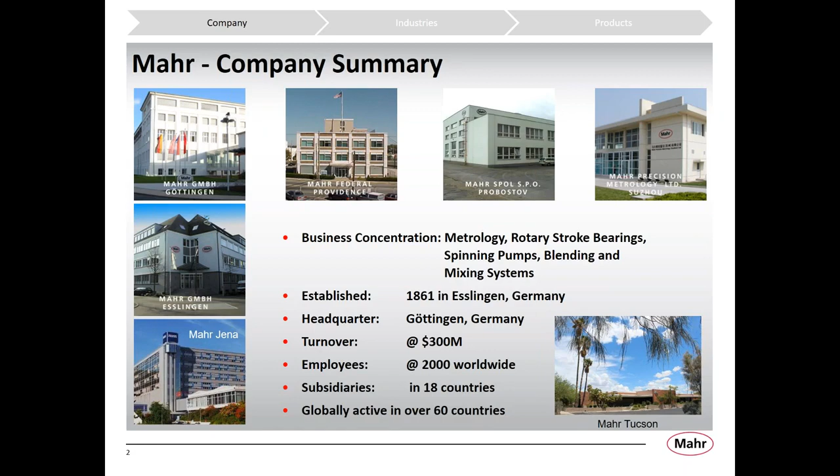Specifically for Mahr OKM, about 2004 Mahr created a division, which I've mentioned a couple times, called Mahr OKM, based out of Jena, Germany. We're actually located in the Zeiss facility on the 7th floor, and that's where the majority of our R&D takes place.

In about 2015, about 2.5 to 3 years ago, Mahr acquired a company out of Tucson, Arizona called ESDI, which joined the MAR group. MAR took all their profilometry experience and precision gauging experience from the dimensional and PG side of the world, and then incorporated the Fizeau and interferometry metrology systems into the product portfolio to give a full symmetry to their product offerings for the optics community.

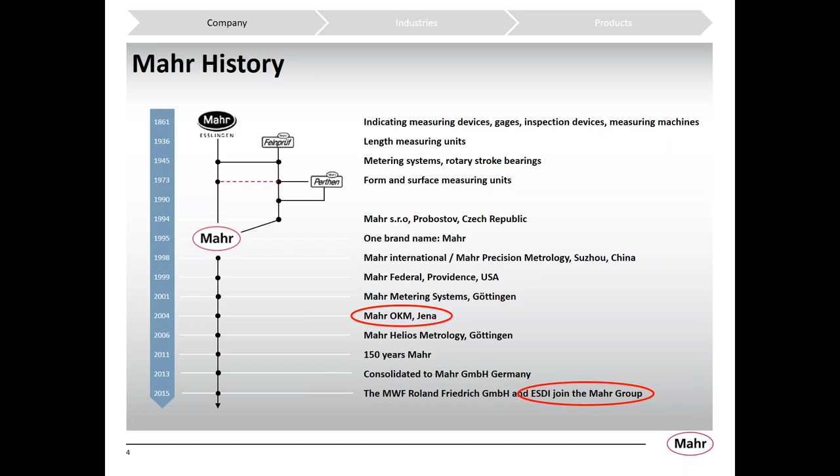We have our service support center out of Erlanger, Kentucky. We have Charlotte, North Carolina. We have a location in Cypress with a full demo facility. And Tucson is where we manufacture the Fizeau interferometers, and also where we have our engineering support and application support for the Americas.

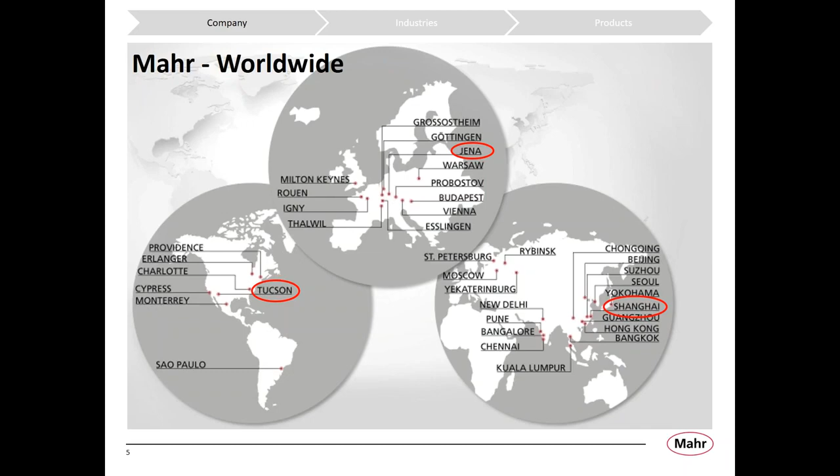Profilometry, contact, non-contact, and Asphere metrology, specifically non-contact Asphere metrology systems as well. I just wanted to give a brief summary of who MAR is, what MAR does, and what MAR offers.

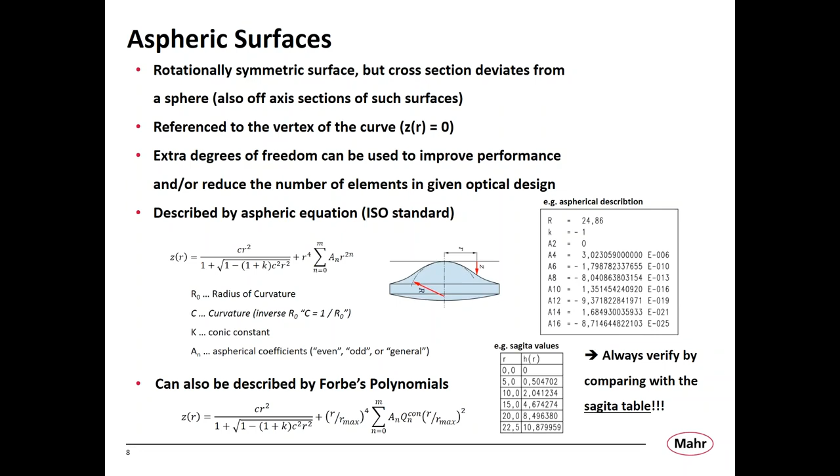However you describe the surface, since there are so many ways to describe it on your optical drawings, it's important to also include a table of the sags, the deviation from a flat of the surface, so that when the person puts the equation into their generating machine, or we're trying to compare it to some measured data, we're able to compare the as-designed to the as-measured or as-generated surfaces. And we make sure that we're all using the same equations and the same coefficients.

So for freeform surfaces, they have no particular axis of symmetry, and so there's no particular reference for the surface. And so it's always important to be able to, in the design, define some surface, define fiducials, and define datums that can be used to reference the surface to the generating machine, to the measurement machine, and to the final application.

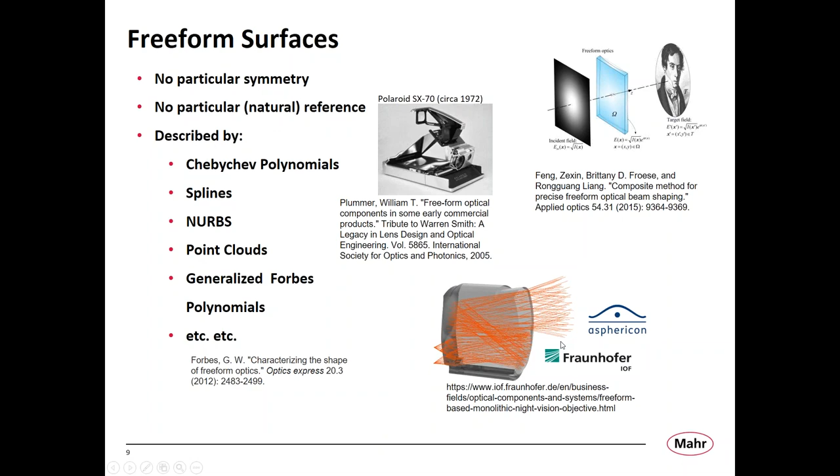However, whether it's a freeform or an aspheric surface, you need to be able to make it. Flats and spherical surfaces are relatively easy to make because they can be made through random processes. But freeform and aspheric surfaces need to be made through some deterministic generating process, such as diamond turning or deterministic grinding and polishing, like is used in the QED magnetorheological finishing system.

Aspheric surfaces can be turned on a high precision lathe, such as a diamond turning machine. You can also use those high precision machines to make freeform surfaces by moving the tool back and forth in synchronization with the rotation of the spindle.

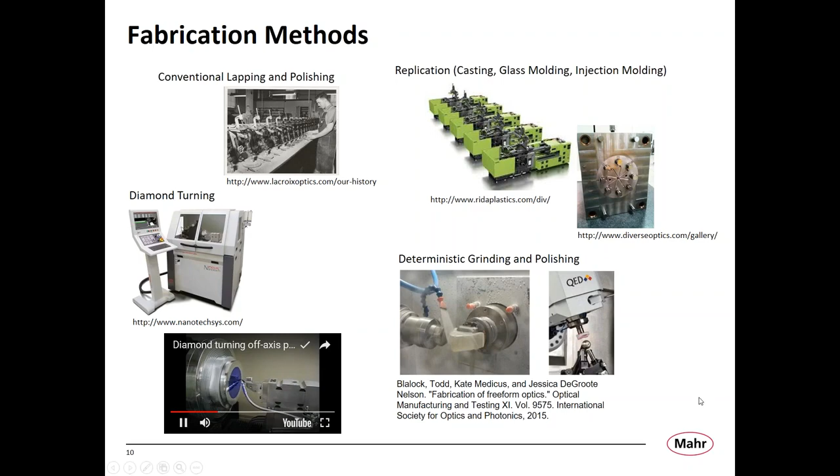However you're making the surface, you have to be able to measure it in some way to give feedback to the generating process, whether it be a tool path correction map for a diamond turning machine, a dwell map for a grinding and polishing machine, or parameter sets for molding systems. That's what I'm going to talk about for the rest of this talk, is how you take those measurements to give that feedback to the generating process.

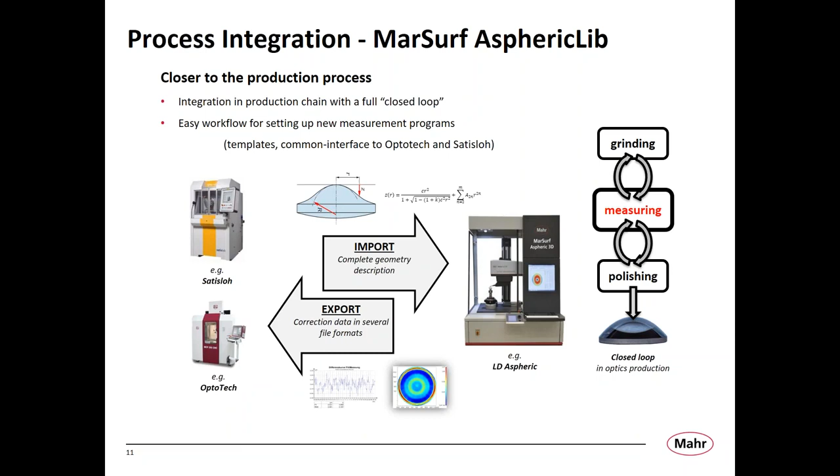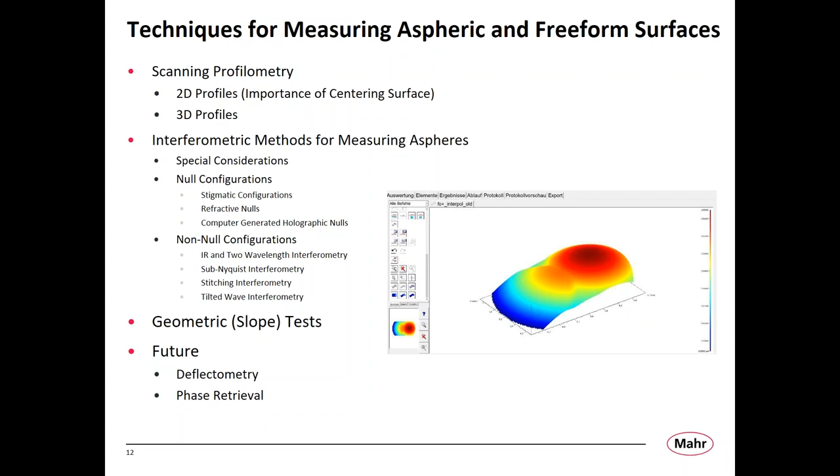I'm going to go through several different sets of techniques, including scanning profilometry, different sorts of interferometric methods for measuring aspheric surfaces, and then briefly talk about geometric slope tests such as the Hartmann Test, and finally finish up with some of the future of where I think aspheric and freeform metrology is going in the near future.

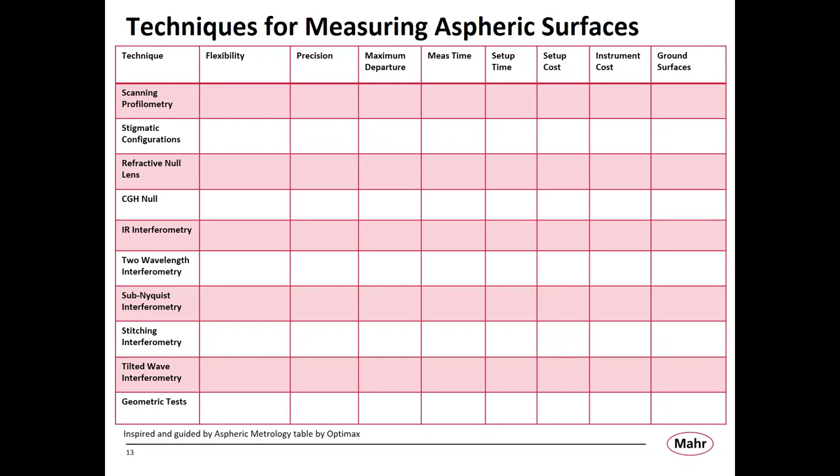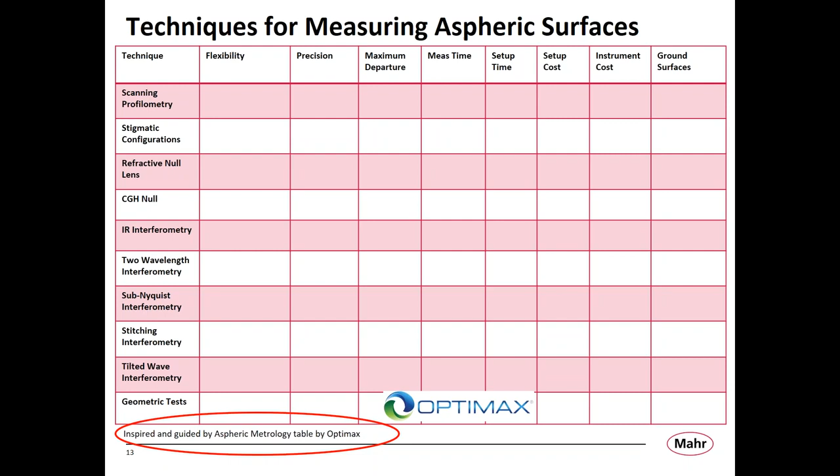The format of this talk: I will give a brief description of the technique, and then I'll bring up this table and we'll fill it in as we go along with the different advantages and disadvantages for each technique. I'd like to acknowledge that several other groups have done similar tables, and after I first built this one, I realized I'd seen this somewhere else, in a very good application note that Optimax put out concerning aspheric metrology.

The first technique I'd like to talk about is simple 2D profilometry. This is where you're dragging a stylus across the surface and looking at the deviation of the stylus with respect to position. You get a 2D trace of the surface, and for final applications you would rather have a 3D trace, but in some applications, such as when you're first starting to grind the surface, a 2D trace is perfectly fine.

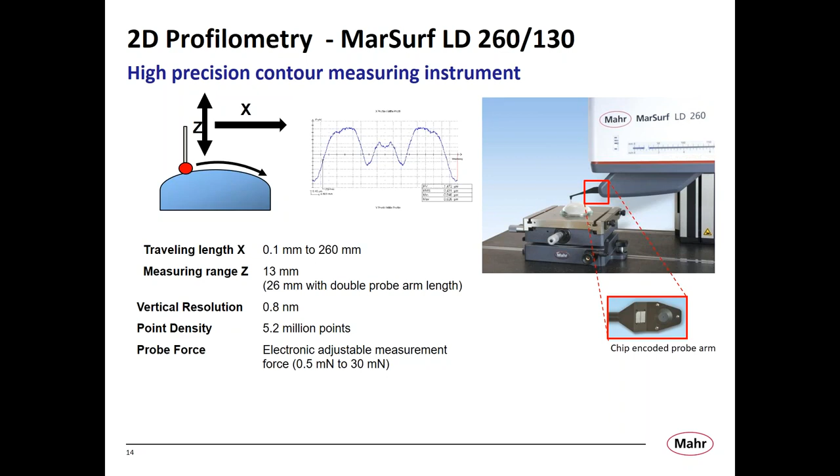I know a lot of the optics people out there cringe a little bit when you talk about dragging a stylus across the surface, but we are able to adjust the force of that stylus on the surface electronically in one of our systems, the MarSurf LD260, reducing it down to forces as low as 0.5 millinewtons. We've been able to measure some very soft surfaces with this and prove that we weren't scratching the surface by taking a scanning white light interferometer image before and after the scan. But of course, always test the surface before you do anything like this. It gives you some very straightforward data—you can fit the curve and understand what the surface looks like.

Now, if you want a 3D map of the surface, you can either probe it using a conventional CMM—Zeiss actually has some CMMs specifically made for measuring freeform optical surfaces—or you can use Mahr systems, which are very good at measuring cylindrical surfaces. We have several systems with a precision rotary bearing where we spin the part underneath the probe. By setting the probe at some distance from the vertex of the surface and spinning the part around, we get a trace of the height along a circular path. If we set the probe at different distances from the vertex, we get a set of concentric profiles of the surface, and then we can fit a surface to those profiles to get an idea of what the 3D surface of the lens looks like.

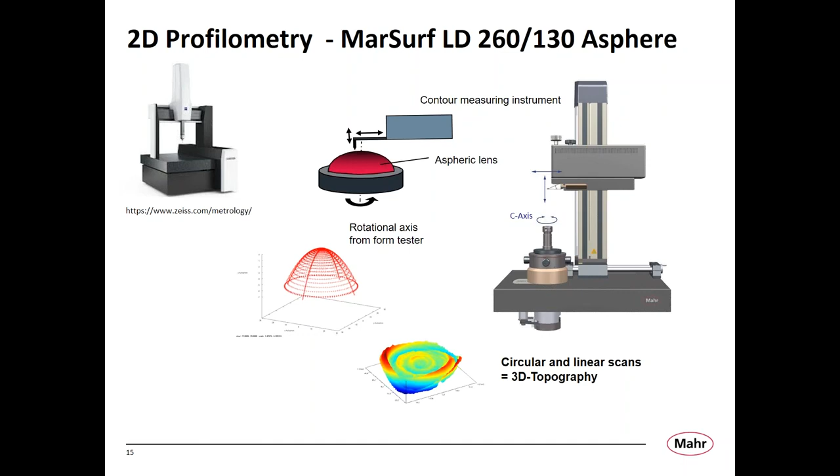So we're also able to use optical probes for doing this. We've got another system called the MFU200 that uses an optical probe where we're able to measure the distance between the surface and the tip of an optical fiber. We illuminate the surface through the optical fiber with a broadband light source.

Because there's some distance between the tip of the fiber and the surface, wherever that distance is 1/2 of the wavelength of any particular wavelength coming out of the fiber, you get destructive interference, and then we're able to record the constructive and destructive interference of the light with respect to wavelength in an interferogram. The peak of that interferogram tells us the distance between the tip of the fiber and the surface under test.

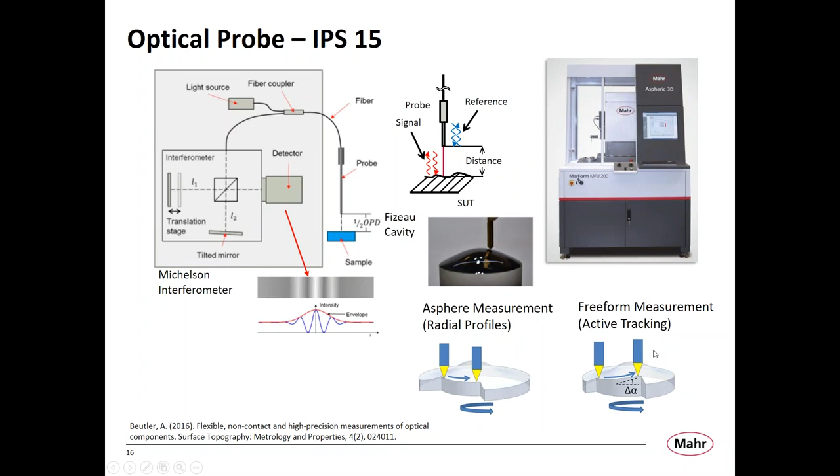So now we operate the system in two ways. In one way, we monitor the wavelength of the peak of the interferogram as we scan the part under the tip of the fiber. That's the way we usually measure an aspheric surface. Or we can try to move the tip of the fiber up and down to keep the peak wavelength of the interferogram constant, and then we record how far we had to move the fiber in order to keep that peak at the same wavelength. That's an active tracking method we can use to measure any sort of arbitrary form, like a freeform surface.

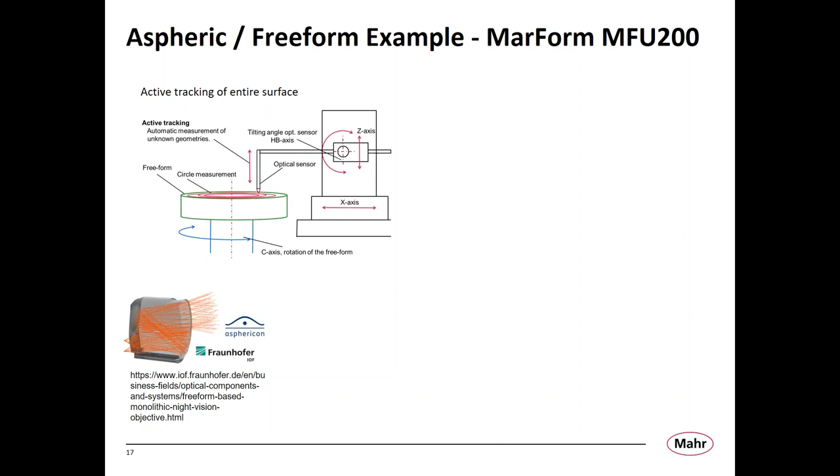So here's an example of how we use the MFU and the interferometric probe to measure a freeform surface. We measured the surface and got a surface map of the height of the surface with respect to position. On this surface map, there's two surfaces - a freeform portion and an aspheric portion. We masked out the aspheric portion of the surface and then subtracted that from the design surface to get a deviation map of the surface with respect to design.

And then asphericon was able to use that as a dwell map to correct the errors of that surface. That was used in this demonstrator monolithic night vision objective that was developed by Fraunhofer.

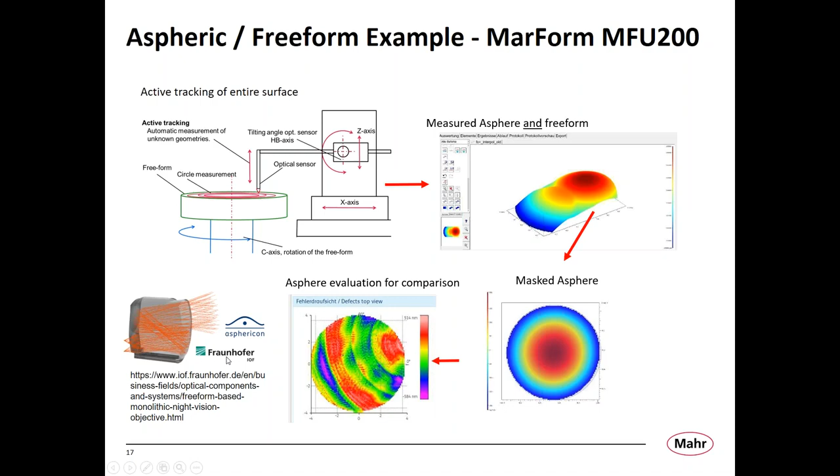Whenever you're measuring a freeform surface, as I alluded to before, there's no natural way of referencing that surface. So you need to be able to reference alignment features on that surface to your generating machine, to your metrology instrument, and to the final system.

Now, when they're manufacturing the optic, they can take that optic, put it on the metrology tool, take a measurement of that surface, then take it back to the generating machine, and use those same features on the substrate of the surface to align the optic to the generating machine. Then finally, once they have the surface they want, they can use those same features on the blank of the surface to align the optic into the final system.

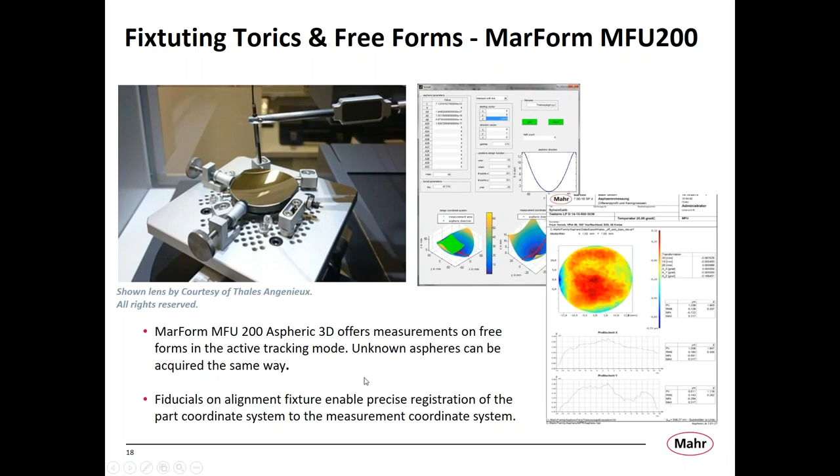And one further consideration to think about when using aspheric surfaces in particular is the alignment of the axes of the surface. Whenever you have two spherical surfaces, there's always some line that you can fit between the centers of those two spherical surfaces, which defines the axis of that particular element.

And then often you'll use that line to reference it in the edging machine, and you can define the mechanical features of the lens to line up with the optical axis of both of those surfaces.

However, for an aspheric surface, since there's an axis of rotation that's specific for each surface, there's no way, if you've got two aspheric surfaces on an optical element, to align both of those axes together - no natural way of just putting a line through both of those axes. So you need to be able to measure the tilt between the axes of both surfaces, and then also reference that to the mechanical edge of the element.

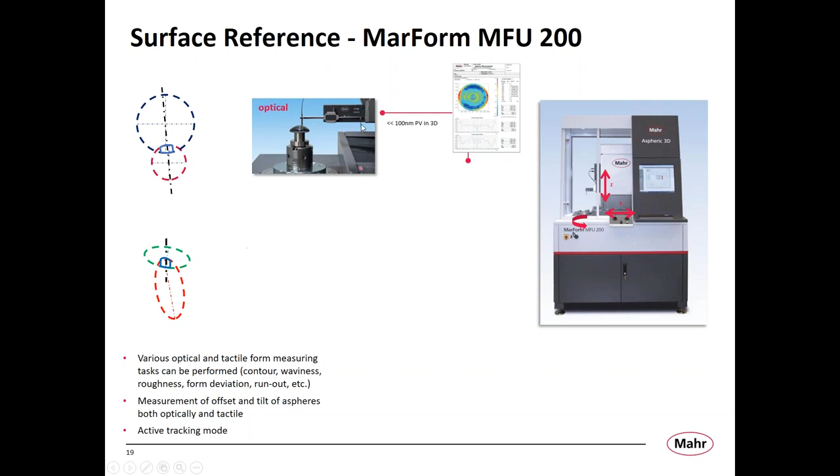So one of the ways that we do that with the MFU 200 is we're able to measure one of the optical surfaces using the non-contact interferometric point sensor, as I talked about earlier. And then we have another probe - if you can see that off to the right of that interferometric point sensor, there's another mechanical probe on that same arm.

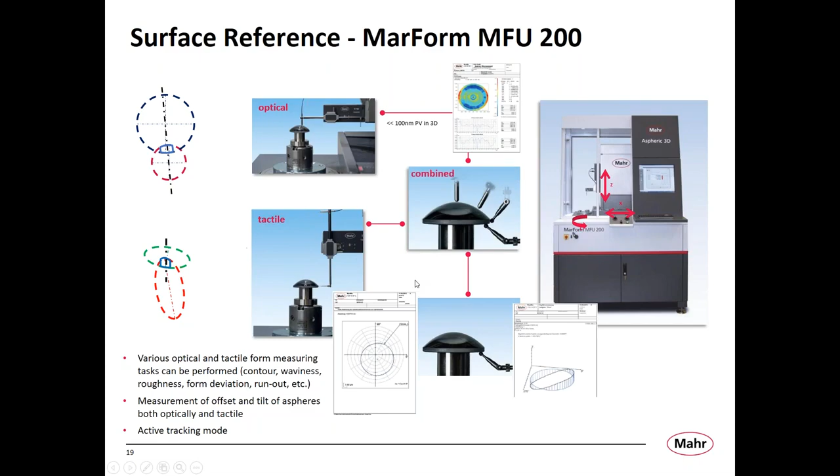So we just rotate the arm around, and we're able to use that to pick up the edge of the element we're testing, without moving the element. Then we use a third probe on that arm to pick up the underside of the element. So now on one machine, without moving the element under test, you're able to pick up the front surface, the back surface, and the mechanical edge of the part, and register all three of those together to get information about the tilt and decenter of each of those surfaces.

So some of the advantages of scanning profilometry are that there's no real symmetry required for the part. You can measure just about anything, well, within reason.

It can measure large departures of the surface from a reference surface. However, you're limited in the precision of a mechanical profiler to about 50 nanometers or so, and some, depending on the profiler, are up to 5 micron precision. But the MFU, for example, can go down to about 50 nanometers. There's a large variety of price points for these instruments, all the way from a few tens of thousands of dollars to some of the precision CMMs that could cost up to $1 million.

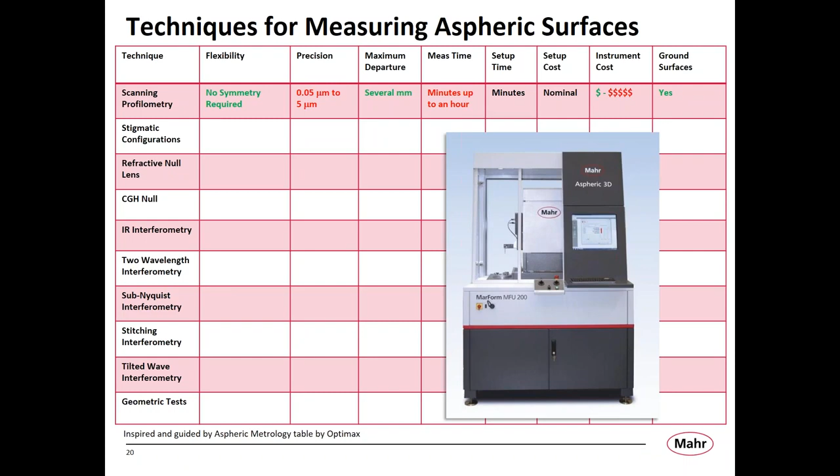One thing I didn't mention about these is that since for the mechanical probes you're not really relying on any sort of reflection from the surface, you can measure ground surfaces with these. So you can measure the surface early in the process.

The rest of the talk is going to be mostly about interferometric methods, and for this group I don't think I really have to go through this too much, looking at the names here.

But for anyone out there listening that's not familiar with interferometry: interferometry is looking at the distance between two surfaces using the phase of the light reflected from both of those surfaces.

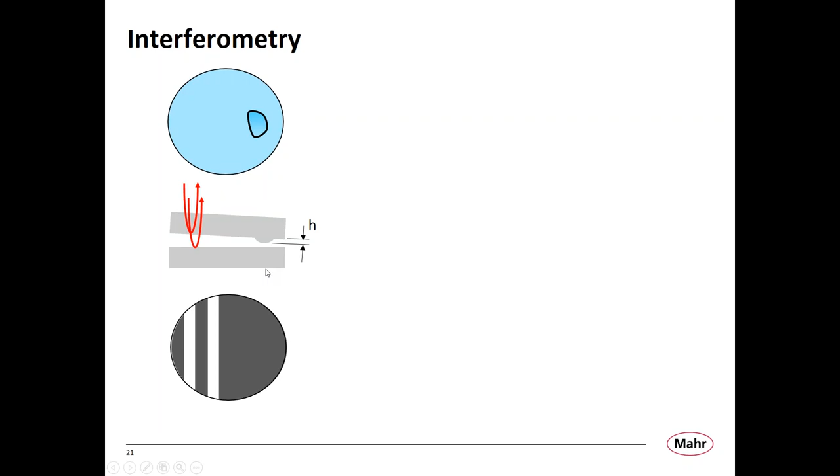If I have light reflected from this top surface, my test piece here, and then reflect light off of this bottom surface, my test piece here — if that light is in phase, then what I see up here is a bright line or a bright spot, because that light interfered constructively. Now if they're an odd number of half wavelengths out, I see a dark spot because they interfere destructively.

And if I keep going across the surface, the distance between two of the same points, we're going to call that a fringe. The distance between two similar points on that fringe is going to be the fringe spacing.

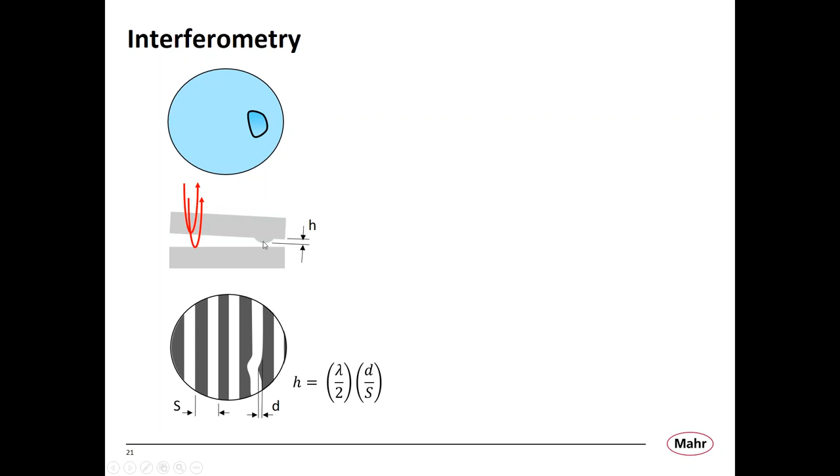So I will get fringes across until I hit some sort of deviation in that surface that's going to show up as a bend in that fringe, and the bend in that fringe is going to be related to the height of that deviation of the surface.

You can kind of think of this fringe pattern as a contour map of the surface, and as the difference between these two surfaces becomes steeper and steeper, this fringe pattern is going to become closer and closer together until you can't resolve it with your imaging system.

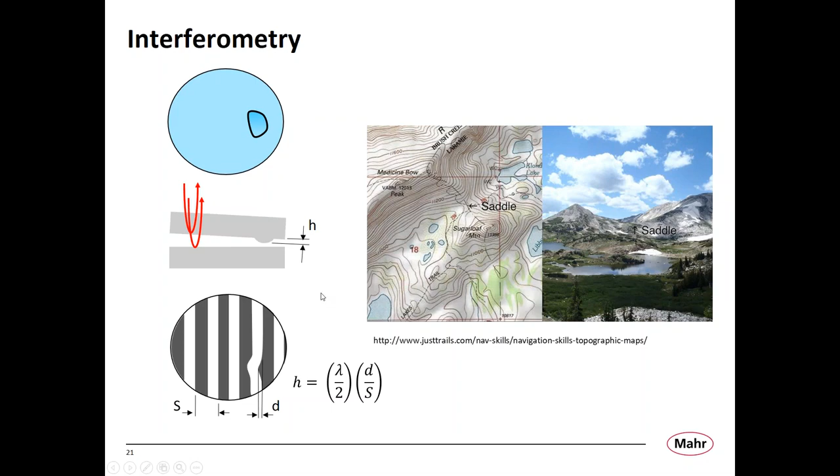That's one of the problems that I'm going to talk about in each of these systems.

Some of the unique considerations when measuring an aspheric surface, as opposed to a flat or spherical surface, using interferometry is that often these generating techniques cause mid-spatial frequency errors — errors that are not quite form errors, not quite roughness errors, but periodic errors in the surface on the order of 10 line pair to 100 line pair per millimeter, which are very difficult to resolve with conventional interferometry, but are very important for controlling the process.

With interferometric techniques of measuring aspheric surfaces, you'll also often have surfaces that have some inflection point in them. Interferometry has a hard time measuring that inflection point because the rays cross each other and you can't really tell what portion of the surface the rays are coming from.

The results of measuring an aspheric surface with interferometry are often very sensitive to alignment, and that alignment is often very difficult. So it's hard to separate errors in the surface from errors in the alignment of the parts of the interferometer.

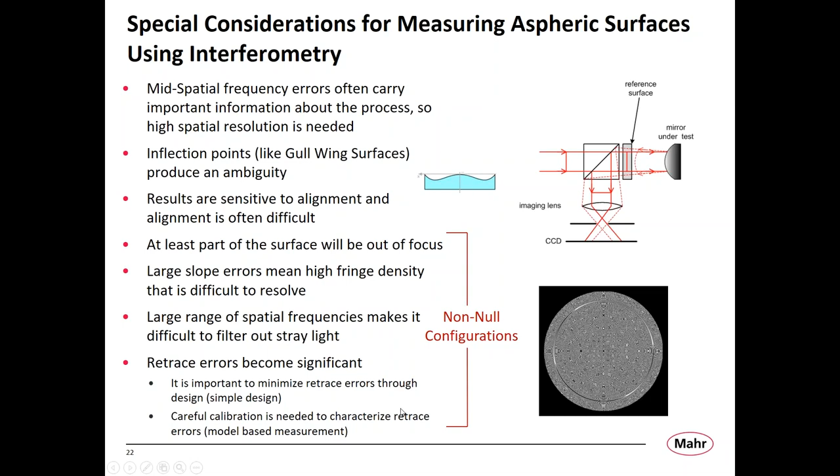Finally, because the rays don't go back through the interferometer in the same way, the interferometer is going to induce errors in the measurement. They're going to be dependent upon the surface that you're testing, and we're going to call those retrace errors. So it's important to do very careful calibrations of the interferometer to characterize what those retrace errors are going to be for any particular surface.

The first technique I'd like to talk about in testing aspheric surfaces is one that's often used for testing sections of conics. A conic surface always has a stigmatic point or a set of stigmatic points, and you can use those as a way of testing the asphere with a spherical reference.

For example, in this case, for testing a parabola, the interferometer is going to create a spherical reference wavefront using a transmission sphere that focuses to a point. If you put that focus point at the focus of the parabola, then if it's a perfect parabola, it's going to perfectly collimate the light, and you get a plane wavefront that then hits a reference flat. This reference flat retroreflects that collimated light back to the interferometer, back to the parabola, and if the parabola is perfect, it's going to perfectly focus the light back to the focus, creating a wavefront that interferes with the test wavefront. If you're all lined up and everything is perfect and the shape of the surface is perfect, then you get a null fringe.

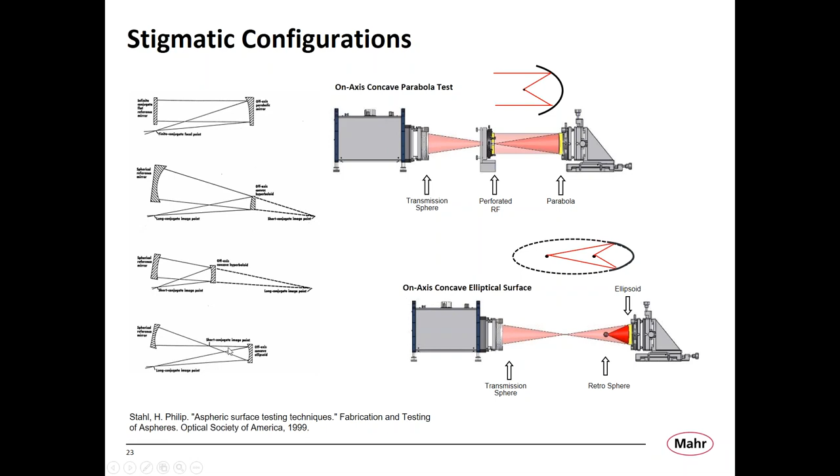Any deviation from that is either due to misalignment of the system or due to an error in your surface. So you're able to do this for many conic sections. For example, here's an ellipsoidal surface, and it's often used in testing these surfaces off axis. It's a very useful technique.

You can measure the surfaces with interferometric precision of tens to hundreds of nanometers. You can only measure conic surfaces, or surfaces that have stigmatic points, where you can get access to those stigmatic points. So that really limits the usefulness of the technique. You cannot measure large departures of the surface from its design.

It really doesn't take long to take the measurement, but it can take hours to set up the measurement because it's so hard to get the alignment right. It's a fairly cheap test because all you need is the conventional interferometer that you might already have in your optics shop, plus some auxiliary optics, and of course fixturing to be able to align everything. Fixturing can be very important in this setup—if you fixture things right, it can make the alignment a lot easier.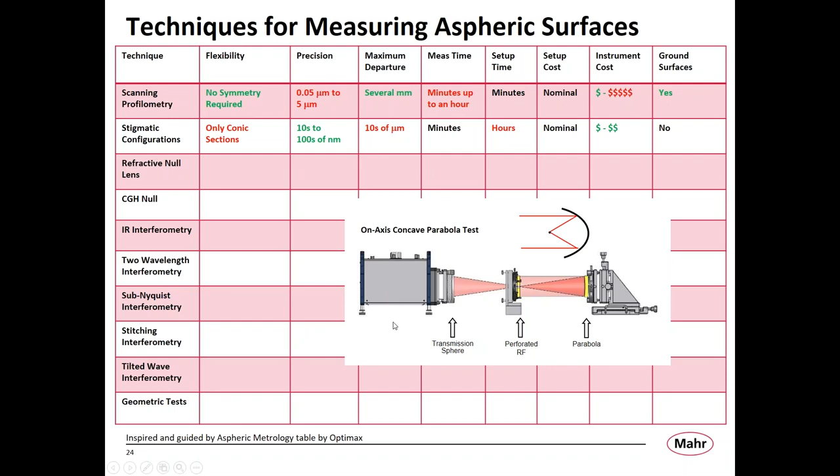The next technique I'd like to talk about extends that idea to create an arbitrary reference surface. You can create these arbitrary reference surfaces by designing an optical system that creates a wavefront with the desired shape using refractive null lenses, such as the Offner lens shown here for testing parabolic surfaces. Or you can generate that reference wavefront using a computer-generated holographic surface, or even a conventionally generated holographic surface.

For the computer-generated holographic surface, you can design an arbitrary diffractive structure to generate an arbitrary wavefront to compare with the surface under test. You can make these fairly well and very precisely using E-beam lithography and etching techniques that were developed for the lithography industry.

One of the nice things about using a computer-generated holographic null is that, in addition to making the pattern to generate the wavefront you're interested in, you can also precisely put other patterns on the same substrate at the same time, which you can use to align the CGH to the interferometer and align the test optic to the CGH. So you can really improve the ability to align the system.

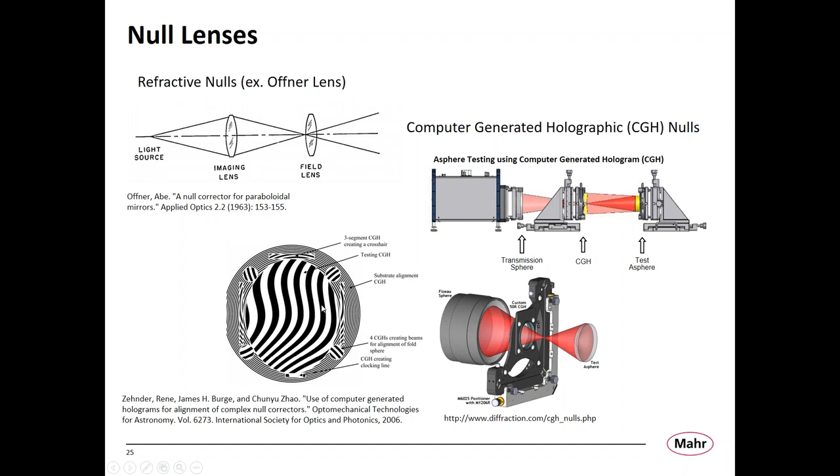So for refractive nulls and computer-generated holographic nulls, you can still measure with interferometric precision. You really can't measure any surfaces that deviate a lot from the wavefront that you generated with the null system.

They can be very fast to take the measurements, but it can take weeks to months to actually make the systems to generate the null surfaces that you want, and those can be fairly expensive. For example, a computer-generated holographic null can cost anywhere from $5,000 to $20,000. So if you're measuring a particular surface over and over again, and you can amortize that cost and setup time over all of those lenses, this can be a very good solution for measuring your aspheric or even freeform surfaces.

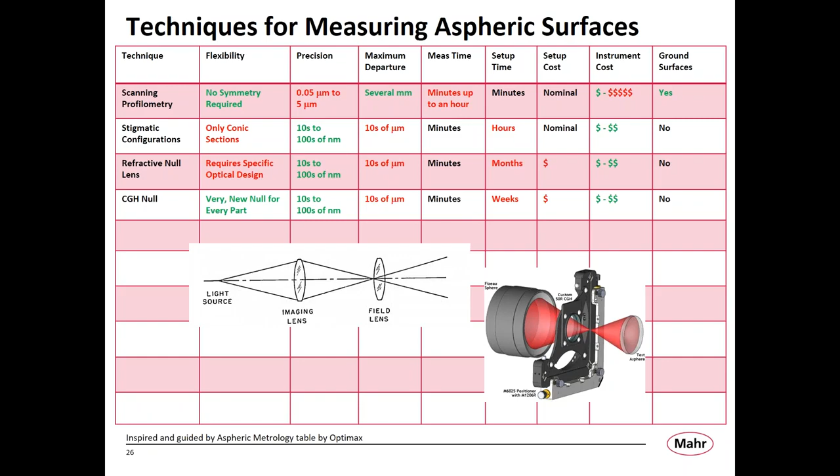Another method of measuring highly aspheric surfaces that depart a lot from the reference surface is to use a longer wavelength. Here's an example of an interferometer made with a CO2 laser at 10.6 microns, which has a sensitivity about 17 times less than your conventional 632 interferometer. So you're able to measure not only surfaces that deviate a lot from the reference surface, but also rough surfaces, because at those longer wavelengths the rough surface still looks specular.

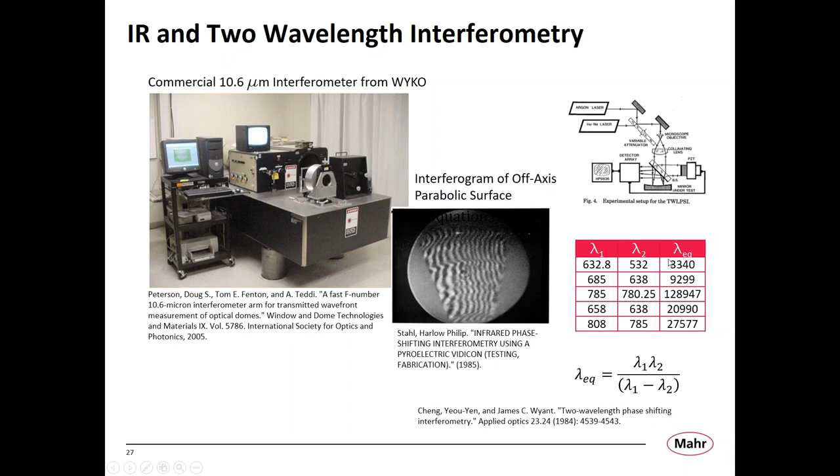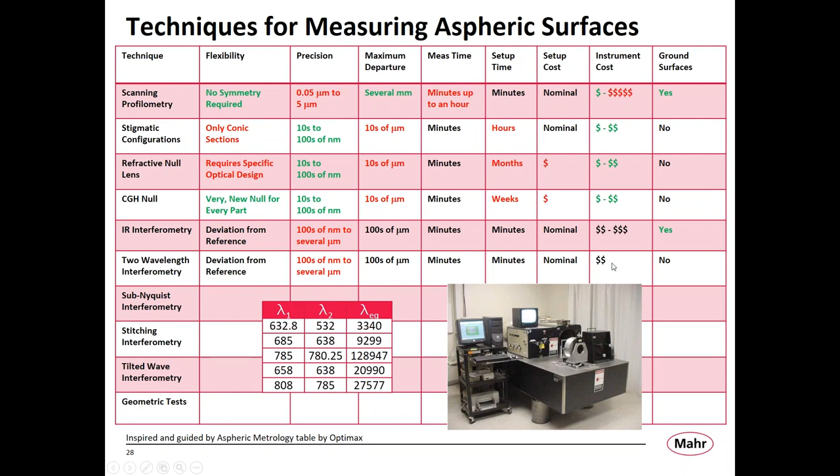So with IR interferometry and two-wavelength interferometry, you can measure very large departures from the reference surface. However, you're limited in your precision to the wavelength, or equivalent wavelength, that you're measuring with. You can get very fast measurement times, and the setups are fairly straightforward. The instruments can be slightly more expensive than a conventional interferometer.

Another way of getting around high fringe densities is to use sub-Nyquist interferometry. In conventional phase shifting interferometry, you're depending on a difference in intensity on a pixel as you vary the distance between the reference and test surface. As you vary that distance, the fringes shift, and you're depending on the intensity at a particular pixel as you shift these fringes to get information about the surface. So if you have more than one fringe covering a pixel, when you do that shift, your measured intensity doesn't vary on those pixels where the fringe density is too large.

However, if you put a pinhole mask over that detector array, you're only getting light from a very small area that each pixel covers. Watch this one pinhole here and that one fringe. Now when you do that phase shifting, you do get information about the wavefront at that particular point. Then you can use conventional phase unwrapping algorithms to fit the surface to that data.

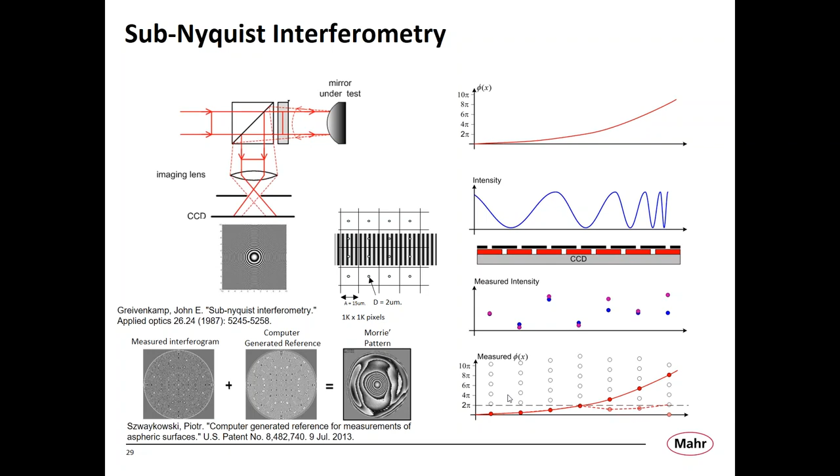So with sub-Nyquist interferometry, I can now measure large departures of the surface from the reference, and I can measure it with interferometric precision. I can basically handle a large range of surfaces. The setup time and measurement time are comparable to conventional interferometers. And of course, because you have to put this mask on top of the detector array and do all these extra things, these instruments are slightly more expensive than a conventional interferometer.

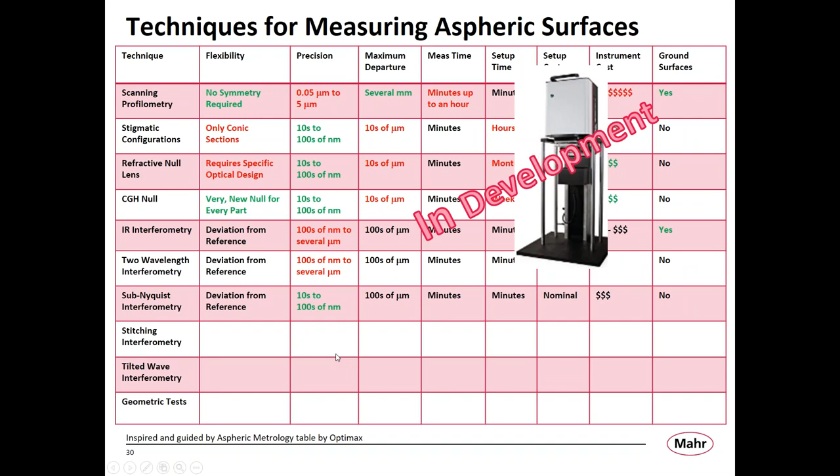And we are now developing this interferometer here at Mahr. Another technique for measuring large departures from the reference sphere is just to use different reference spheres, or measure the part at different points—fitting different radius of curvature spheres to the surface.

Here's an example of how Zygo does it with their Verifire Asphere tool. They take the part and move it along the optical axis, and each time they move it, they're able to resolve fringes in a different portion of the pupil. By moving the part and fitting a surface in each of these annular zones, they stitch together those zones to get a map of a complete surface.

QED has another technique for stitching together areas of the part to get a complete map of the surface. They move the part so they get resolvable fringes over different areas for different orientations, making these areas overlap so that once they've determined the form of the surface over each small overlapping area, they can stitch those together to get an idea of what the entire surface looks like.

So a method that Mahr is developing, originally proposed and initially developed by Wolfgang Osten's group in Stuttgart, is called the tilted wave interferometer. For a standard interferometer, you have a point source that is collimated and focused using the reference optic to create the reference wavefront for the part under test.

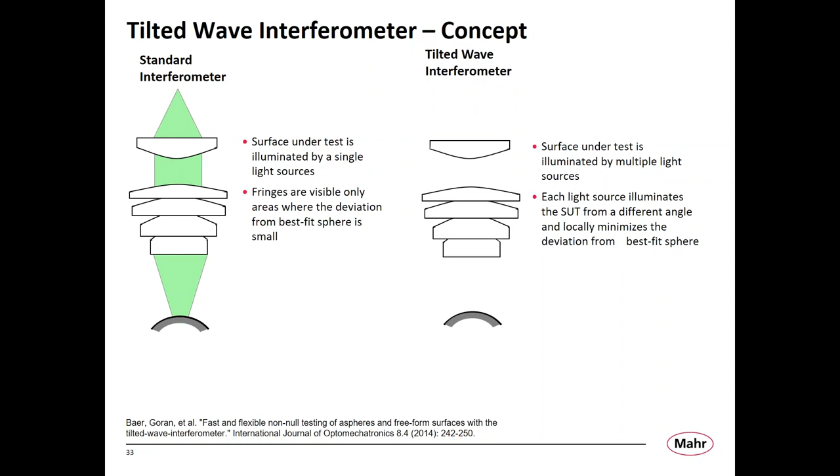Now if I take that point source and move it, I get an interferogram just like in the stitching interferometers. Moving that point source actually tilts the reference wavefront with respect to the part under test. If I move the point source to another spot in the entrance pupil, I get another wavefront tilted at a different angle with respect to the part under test. Continuing that, I get a series of interferograms, each with a different tilted wavefront.

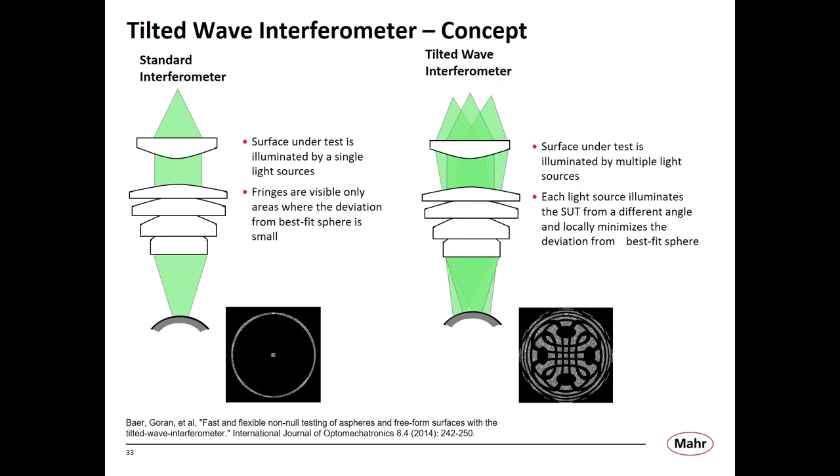That would take quite a while also. But what Osten's group realized is that instead of moving the point source, you can create a bunch of point sources using a lenslet array. So that's exactly what they did—they created hundreds of point sources by putting a lenslet array in the pupil.

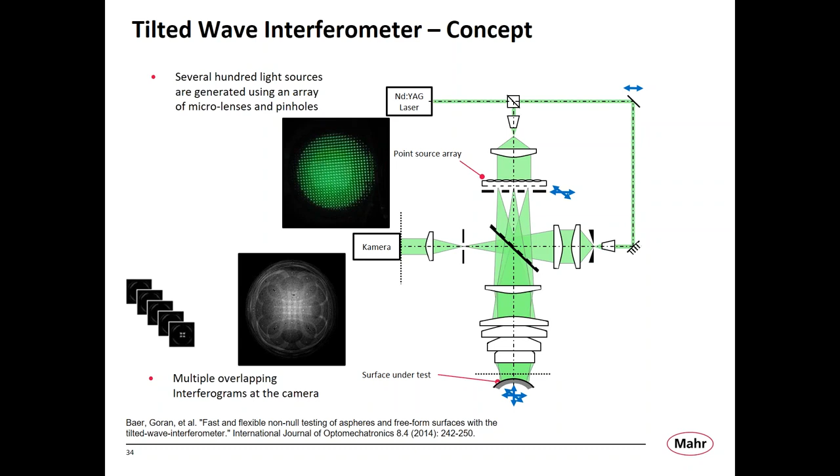Then they can phase shift the interferogram, getting a set of phase-shifted interferograms that are a combination of the interferograms created by each of those point sources. One issue is that interferograms from adjacent point sources will overlap, and you won't be able to distinguish the phase shift information from one lenslet from the lenslet next to it.

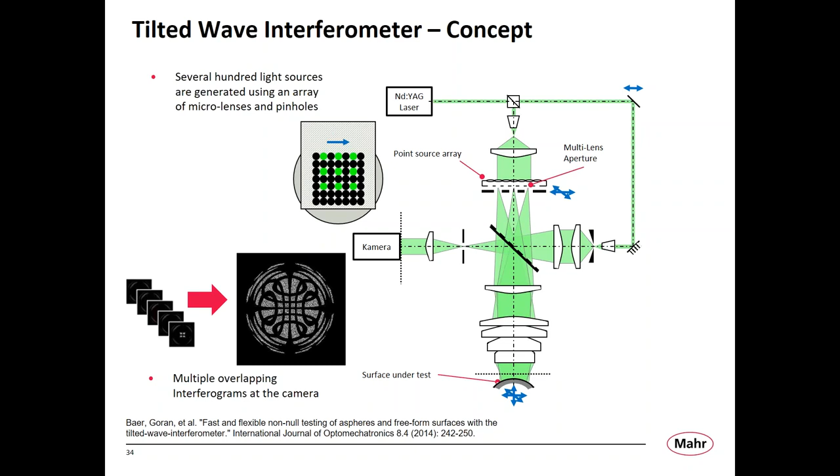So we put a multi-lens aperture into the system that blocks every fourth lens, or blocks 3 out of every 4 lenses, so we're only looking at information from every 4th lens. Then we move that aperture around. So instead of moving the part and needing to move it very precisely, all we're doing is moving an aperture around to get a bunch of parallel information at once.

So we get 5 sets of information from each position of that multi-lens aperture, and that positioning doesn't have to be as precise as positioning the surface for stitching. We get sets of interferograms that we're able to determine the phase and unwrap, and determine the surface shape for each of those sets of interferograms, then combine those to get a map of the entire surface.

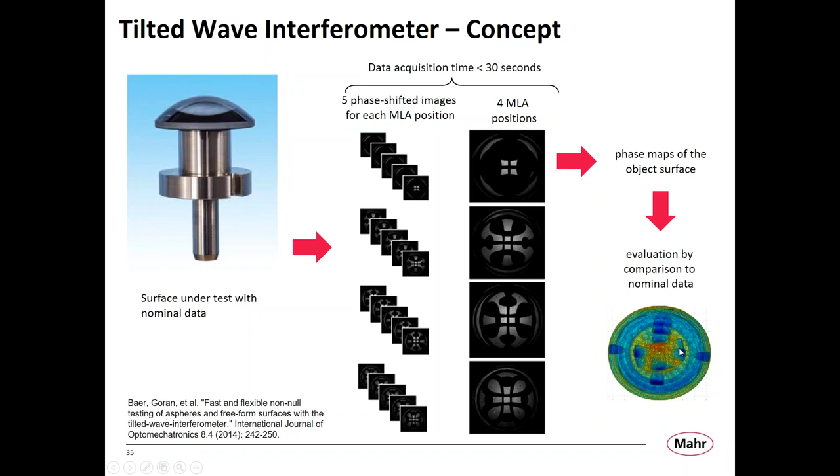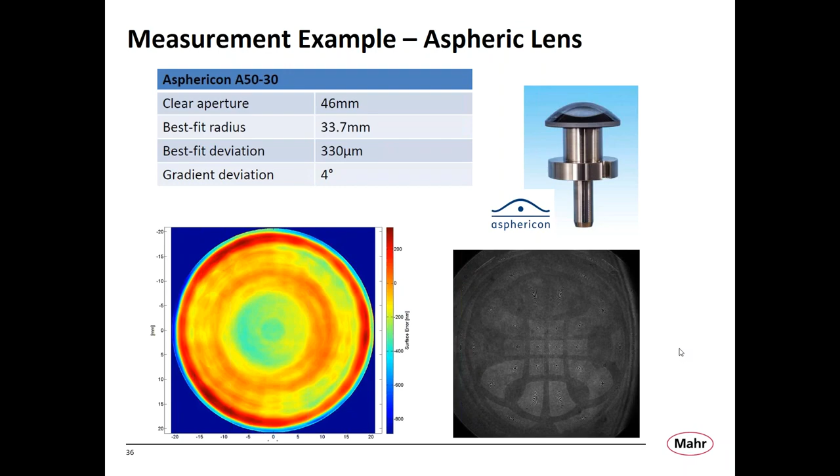Here's an example of doing this for a fairly mild asphere. This one has a gradient, a deviation from spherical of only about 4 degrees. But with this technique, we're able to do deviations of up to about 8 to 10 degrees, which is significant.

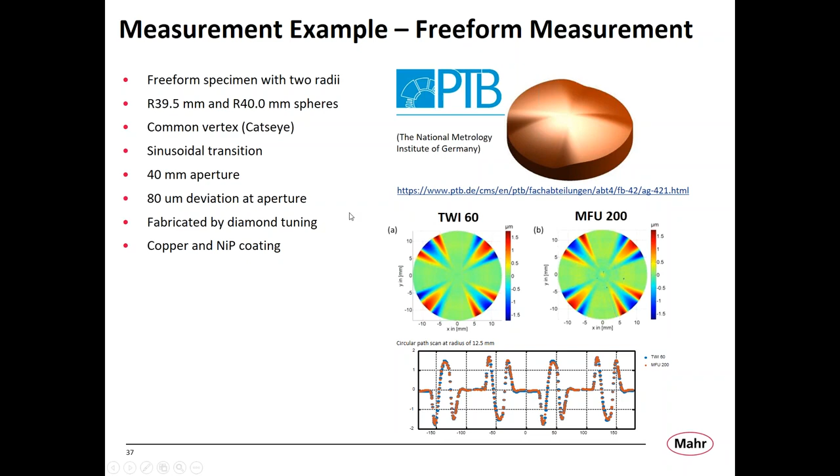So the tilted wave technique now, you can measure large departures, just like for stitching interferometry. You can measure them with interferometric precision, just like stitching interferometry. But instead of taking tens of minutes for an individual measurement, because you have to move either the part or the interferometer, now you can do it in minutes because all you're moving is that subaperture array, so you're not getting conflicting data between the different point sources.

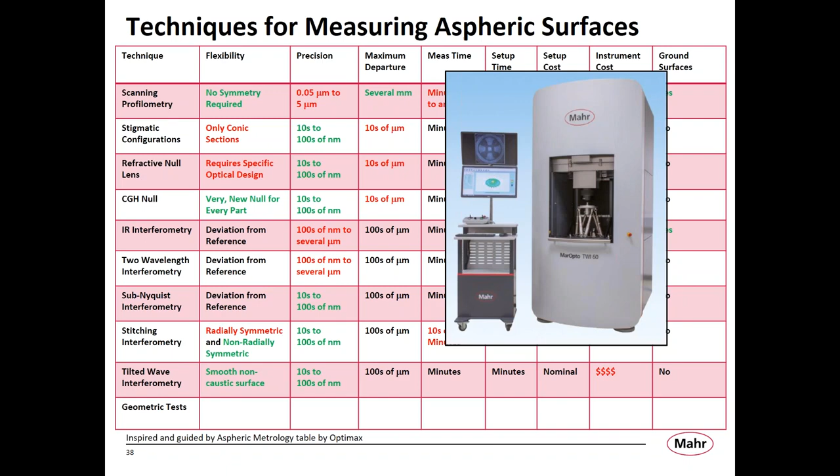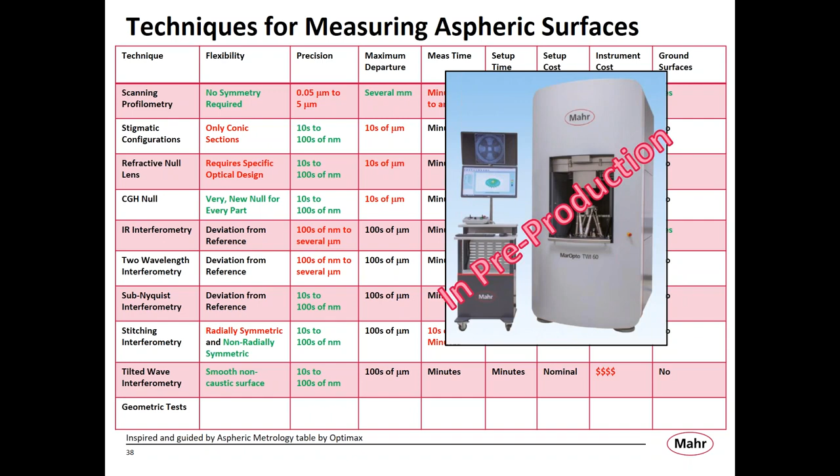And it's equivalent in price to the stitching interferometers. So we are now in pre-production with this. We have several instruments in the field with select customers, and we're gathering data and user experience from the instruments so we can introduce those sometime next year.

I'd like to throw in also geometric tests, such as the Hartmann test or the knife edge test. These tests in general are more qualitative than quantitative, although there are quantitative versions of each. I'll also talk about another method called deflectometry, which is a quantitative version of a reverse Hartmann test, as they like to refer to it.

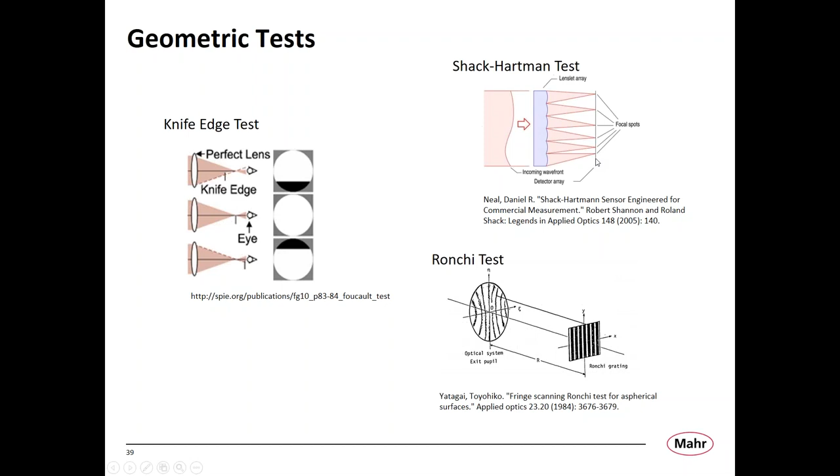But with each of these tests, you've got the wavefront, and you're deviating the wavefront some way using the test and observing that deviation on a detector. If everything were perfect, for example for the Hartmann test, all of these lenslets would focus right at the center of each reference point on the focal plane, and any deviation from perfect causes the point to shift in the focal plane. So geometric tests are very nice in that they can measure large departures.

They can't really do the precision of interferometric tests, but they can be really cheap to set up. So it's a good secondary test to make sure that all the expensive tests you've made, you haven't done some alignment incorrectly. I'm a big fan of using geometric tests to check on the interferometric tests you're doing.

One of these geometric tests that I think will be used more and more in the future is what's now termed deflectometry. The group over at the Mirror Lab at the U of A is using deflectometry to a lot of advantage.

Basically what they've got is they hang a big screen TV above the optic with a series of lines on it. Those lines are reflected by the optic, and they look at them with a camera. When the lines are reflected by a curved optic, the line itself will curve. They're able to phase shift, move these lines back and forth, look at how the lines in the image plane change, and then calculate the shape of the surface from that.

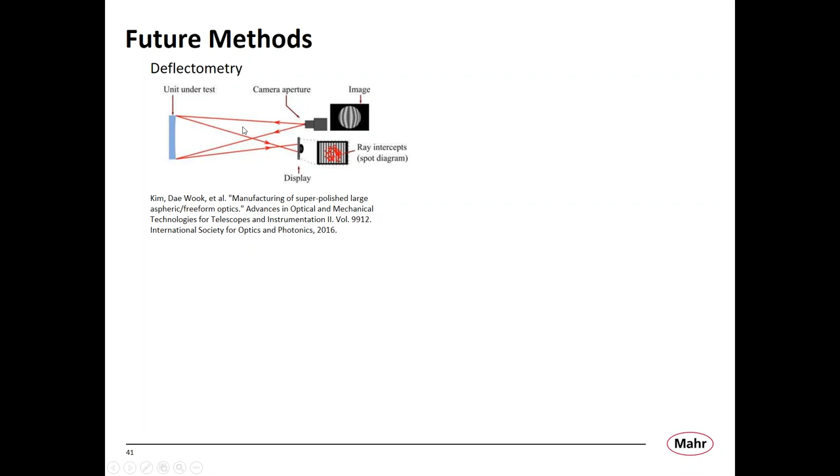One of the important parts of this is you need to be able to calibrate it very well. You need to know the exact distance from every point in the display to every point on the surface under test, to every pixel in the camera array. You have to know all those distances very precisely, so there are a lot of calibration techniques they worked up for determining those distances. That's a very neat technique.

Another technique that I think will be used more and more for measuring the shape of surfaces, which has been used in the past for measuring the shape of wavefronts to great advantage, is phase retrieval.

With phase retrieval, you're moving an aperture around the pupil and recording the intensity on a camera, a detector array, for every position of that sub-aperture. Using ray tracing, if you know the shape of the wavefront hitting the surface under test, what the surface under test looks like, precisely where that sub-aperture was, and what its shape is, you can calculate what the intensity pattern on the detector is going to be.

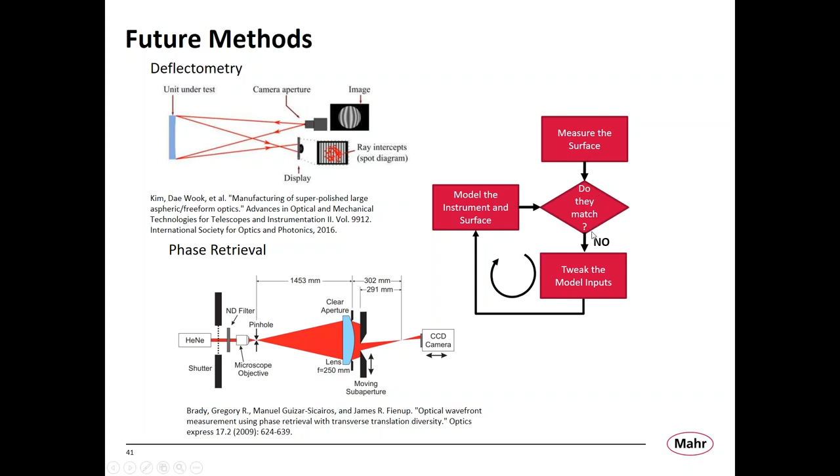So if you've got a model of the measurement and you've got a measurement, you compare the two together and see if they match. If they don't match, I tweak something in my model, such as changing the shape of one of the surfaces on the lens, and recalculate the model, then see if it matches again. I keep going around in this cycle until I get a measured result that matches the modeled result. When it matches, I've determined to some degree what the shape of that surface looks like.

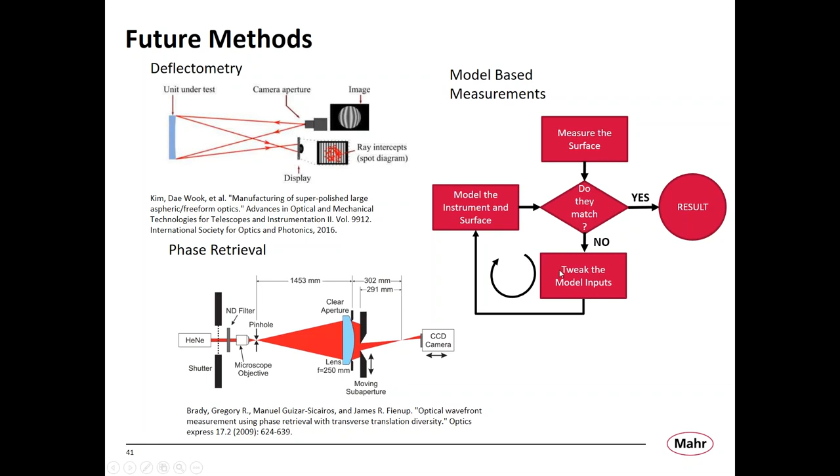I call this model-based measurement, and I think it's going to be more and more important for determining the shape of surfaces with low uncertainties for just about any of these techniques. For example, with deflectometry, a model-based measurement could be used to determine the relationship of the different positions of the camera, the display, and the optic.

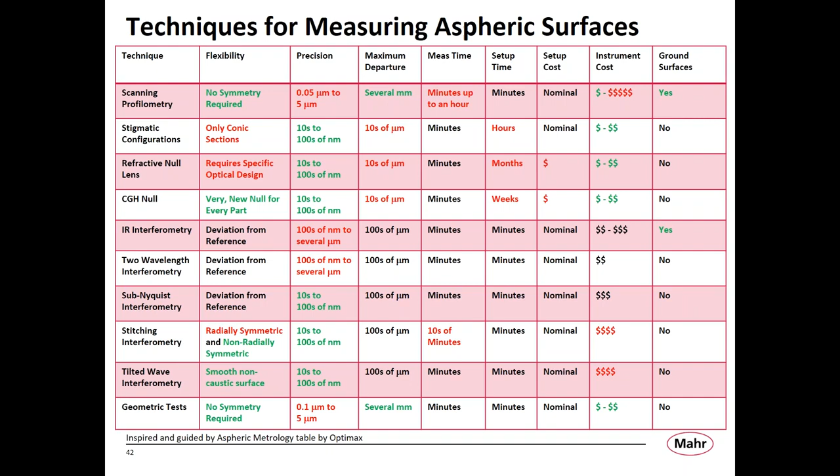This is a summary of what I've talked about. You can see there is no perfect technique for doing every measurement you need on aspheric and freeform surfaces. But hopefully I've given you some idea of the advantages and disadvantages of each technique, so you could use that to pick the metrology techniques best for your particular application.